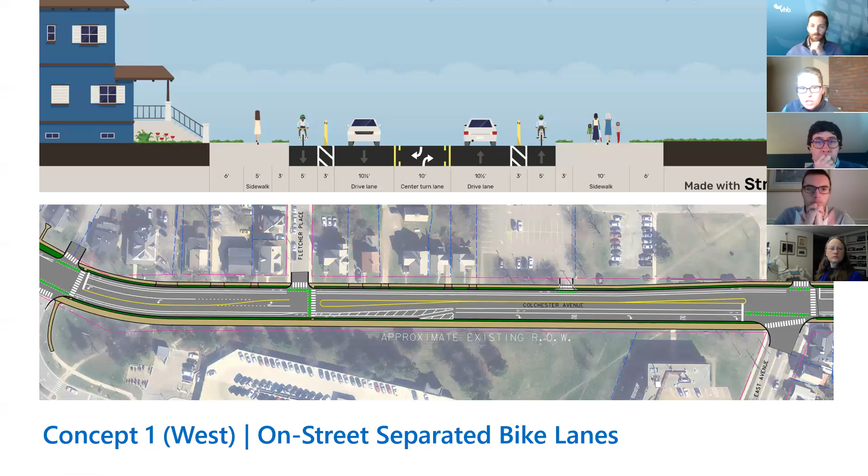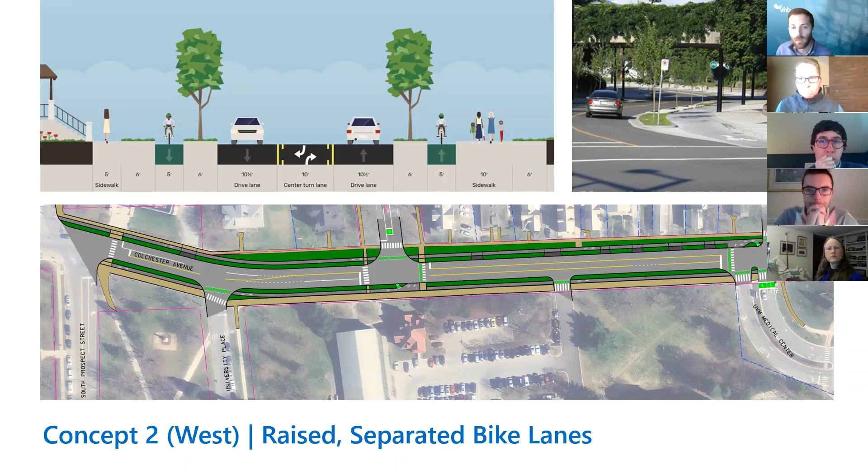Now we're going to look at Concept 2 for the west end of the corridor, which includes raised and separated bike lanes. As you'll see in the cross section and layout, the bike lanes in this case are both horizontally and vertically separated from the roadway. This design will also have a slight vertical separation from the sidewalk to clearly define space for each user. We have a sample photograph - it's slightly hard to tell the vertical delineation between the sidewalk and the raised bike lane, but we're talking a very slight change of grade just to emphasize that separation. There is enough width here to call for grass strips wide enough on both sides to allow for new tree plantings. And even with the widened grass strip, the area of impact does not extend, similar to Concept 1, beyond the existing back of sidewalk. Given the vertical separation in this case, being the main difference between Concept 1 and 2, there's naturally more space for bikes and peds to operate separate from traffic.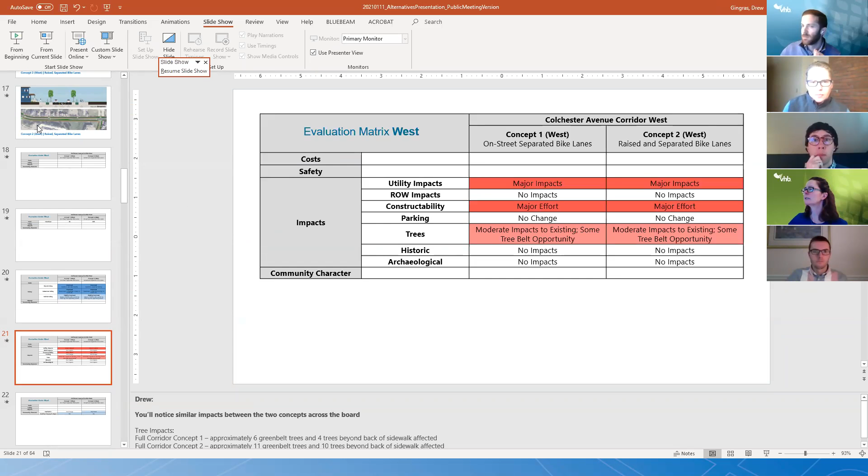And then there was another question about one version having plantings and one does not. Similar to the stormwater impact, I think the amount of green space in each alternative would be similar. It's just where it's located, correct?

Correct. So that was referring to the width available west of the UVM Medical Center driveway relative to that which is available to the east. We have it in our current concepts that there would be 6 feet of available grass strip space west of the UVM Medical Center, wide enough for tree plantings. To the east, in the interest of avoiding any private property and right-of-way impacts, we have a narrower grass strip of 4 feet, which generally is not considered sufficient for tree plantings.

Finally, there is a question, and I think we got this in some of our preliminary feedback, that has to do with how bus stops will be accommodated with the raised bike lanes. I believe that's a detail that would be worked out later, but there are examples of how that can be accommodated. Examples not being presented here, but there are design examples in the field that we would absolutely reference, making sure we are minimizing or mitigating any potential conflicts between bicyclists, pedestrians, and transit users.

In the final clarifying question—oh wait, there's a couple. One is, how do cyclists turn left on the separated raised path?

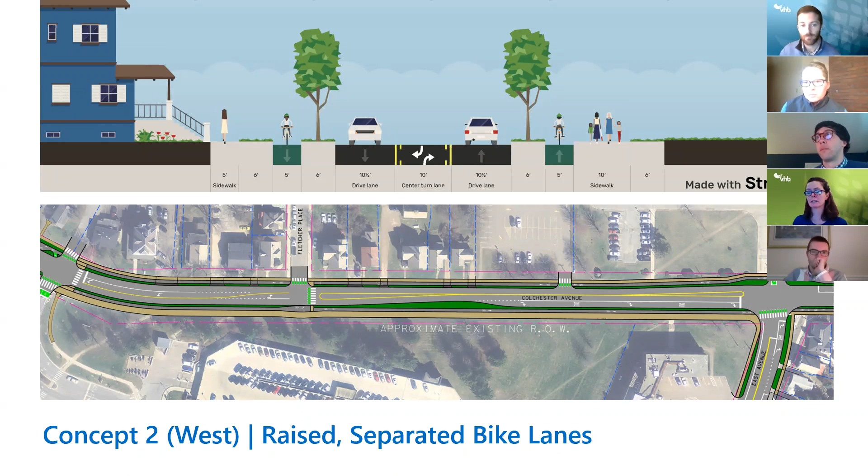There is also one other question about whether we have spoken with GMT, and I can answer that because they do sit on our committee. So we do have some input from GMT as we move through the process.

There's one question about something that happens in the design phase - what level is their involvement at this stage? I think that's referring back to GMT. As I said, they are involved at the committee level, so we are getting input from them as we go. But obviously those details will be worked out later. Drew, I think that's it.

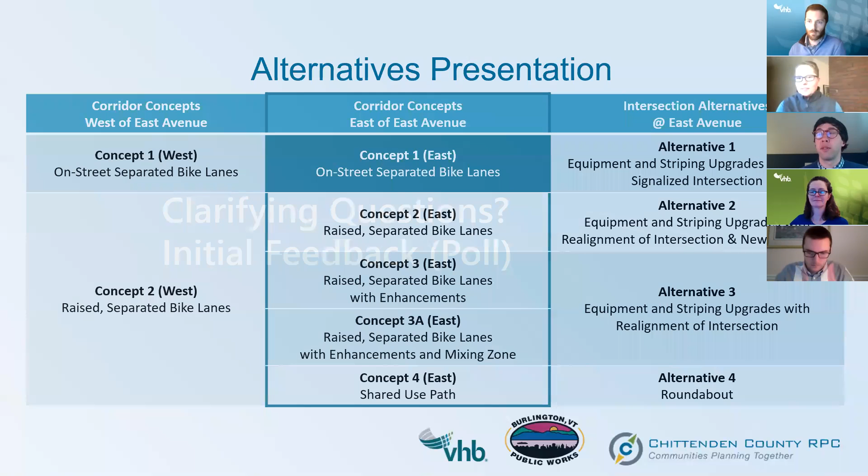All right, we all set on this section then, Drew? Yep, we do have one hand raised now. Jack's hand is raised. Jack, did you have a question? It says my question was answered live, but I don't believe it was. All right, Jack, I apologize if I missed you here. I will just allow Jack to talk really quickly so we can finish off this section. Okay, Jack, you should be able to unmute now. Go ahead. Jack, are you able to unmute? I apologize if I missed your question. I can go back, I'm sorry.

His question was: could the project team explain why raised separated bike lanes are not considered any safer than the on-street lanes in the evaluation matrix? Sorry, my connection got messed up, did I miss my window? No, but Matt did just read your question, Jack. I don't know if you did want to repeat it. If it sounds fine as read, that's okay. So, why are raised separated bike lanes not considered safer than the on-street separated bike lanes?

In the case of actual safety, this is why we touched on this the way we did - it's kind of a measure of actual versus perceived safety. Raised separated bike lanes are, in actuality, very similar in nature to an on-street but still vertically separated bike lane. So we thought it was pertinent to mention that when you're assessing these two facility types, they are actually considered equally safe against each other. However, there is the matter of perceived safety, which perhaps is what you're alluding to. That's why we touched on the interested-but-concerned population of bicyclists. When they see a raised separated facility that is off the street, we think that facility is more likely to pull in a larger cycling population to use, because they will perceive it as safer since they see it as vertically separated from vehicles in addition to being horizontally separated from motorists.

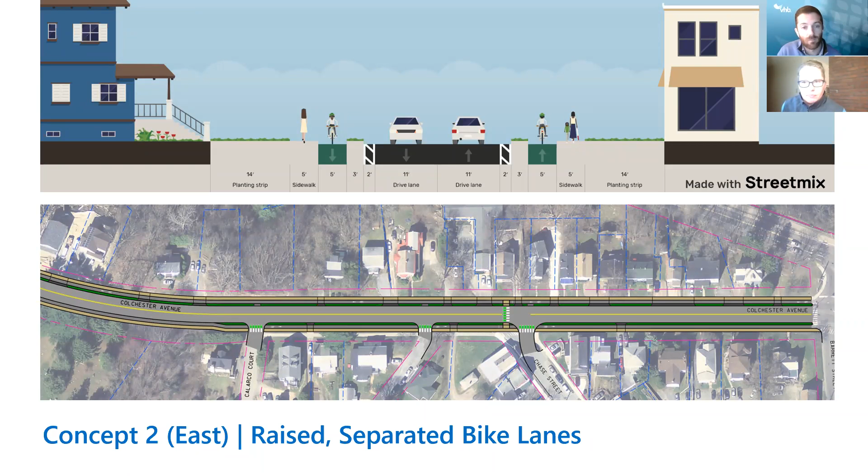All right, moving on to Concept 3. Just a reminder, for mobility - bicyclists and pedestrians - this cross-section is generally the same as Concept 2. The big difference comes with attempting to address the need for parking for residents and parking to support local businesses along this segment of the corridor. So we can see here in Concept 3 the balance of trying to implement the on-street parking while maintaining consistent facilities for bicyclists and pedestrians.

Given the presence of businesses like Kathy's Flowers and Campus Kitchen, there was an expressed interest for this parking to be located on the southern side of the corridor. So that's what you're seeing here with the enhancements made east of University Road in a few locations.

Just for everyone's clarity, we're not continuing east because continuing east of Concept 3 and Concept 3A down the hill, it's the same cross section and layout as Concept 2, just to avoid any questions about that.

So Concept 3A - as conversations developed with Campus Kitchen, it was noted that there was a strong desire to evaluate the possibility of maintaining short-term, high turnover on-street parking immediately in front of their location. As such, this specialized Concept 3A was created. It mimics Concept 3 in its inclusion of on-street parking in select lower impact locations, while also pursuing, as seen in this layout, on-street parking immediately in front of Campus Kitchen.

Given the need to balance all users in this very tight cross section, this concept calls for a change to the corridor dynamics for bicyclists and pedestrians, as you'll see between Thibault Parkway and University Road. Highlighted on this slide is the creation of a narrow shared use and/or slow or mixing zone space for bicyclists and pedestrians through the frontage of Campus Kitchen.

Given the high vehicular turnover, the project team believes it makes sense to encourage a slow zone at this location anyway. When you think about high turnover parking areas, whether it's pickup drop-off or food pickup, which is ever more important these days, we try to build in that curbside management piece to the project as we look at them.

In this section, the back of sidewalk in this concept is generally within 1 to 2 feet of the existing back of sidewalk along this entire stretch. So the impacts do reach beyond the existing back of sidewalk, but the impact is pretty minimal—again, 1 to 2 feet—to better accommodate that mixed shared use path on the north side.

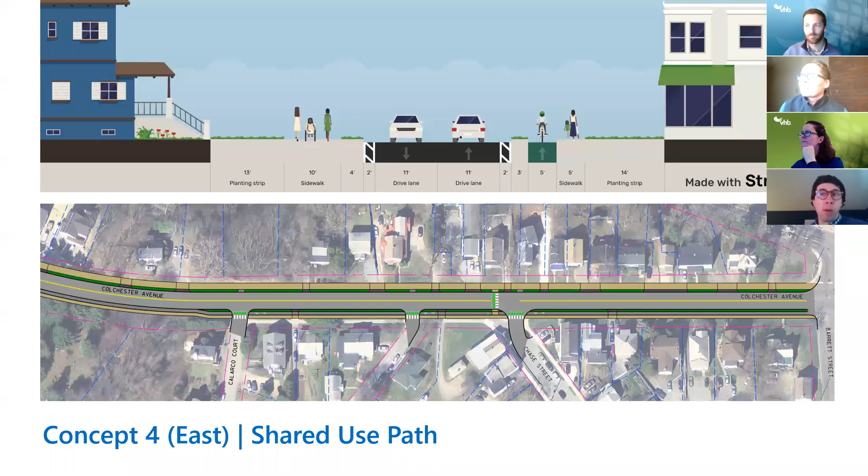Yeah, thank you so much. Can you hear me? Yep. Awesome. My question is, at the points of shared use, where you enter and exit those lanes, where do you actually enter and exit them? Going up Colchester Ave or down Colchester Ave feels like a commitment. So how do you decide which you're committing to, and how do you enter those separate lanes? And then how do you exit them?

In that specialized case, you would do as you just said: at Thibault Parkway, you would enter the road, bike in the lane, and then re-enter at University Road. So you have to wait, I guess, if it's a continuous lane for bikes, until a street entrance to exit it?

Yes, generally yes, or a driveway. I don't know that that's the right answer, but at a driveway you could go down or up, but typically it's at side streets where the ramps are set up to allow you to. Okay, thank you. Perhaps this is a better example. You can see that driveways and intersections ultimately provide you your reprieve to enter and exit the facility while traveling along it.

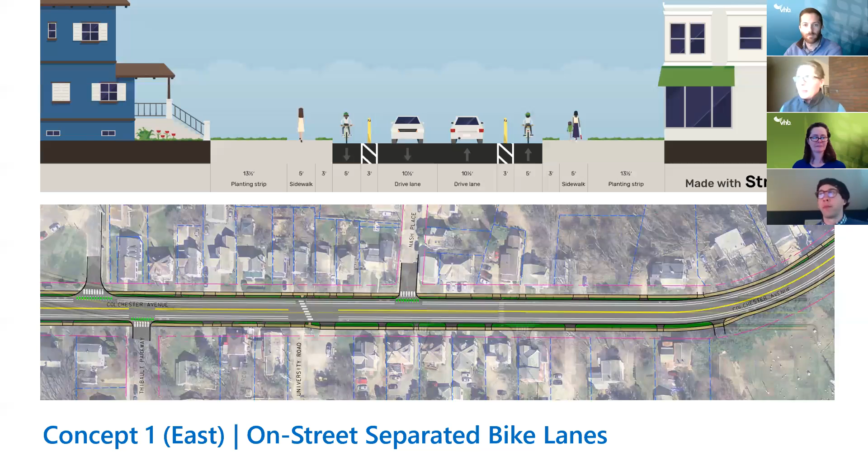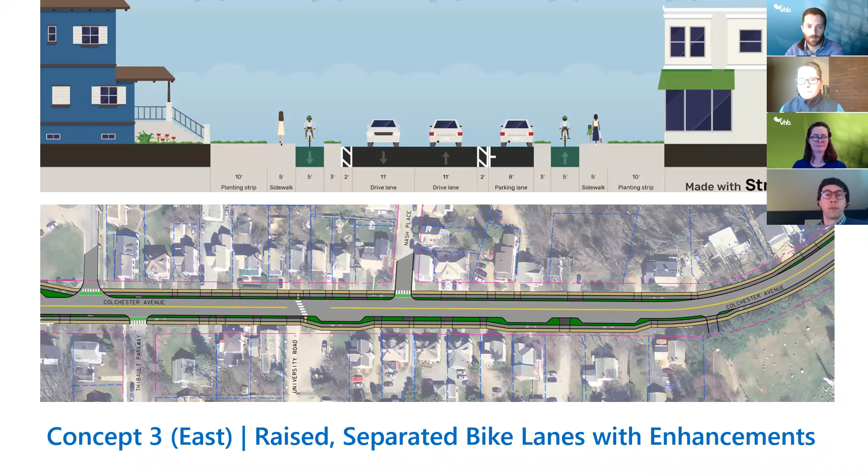Certainly. Starting with concept 1, east, our on-street bike lanes. Concept 2, east, our raised and separated bike lanes. Concept 3, east, raised and separated with enhancements in the interest of maintaining parking. 3A is the specialized concept with enhancements to maintain parking and add short-term high turnover parking immediately in front of Campus Kitchen. And concept 4 is raised and separated bike lanes in the eastbound direction and a shared use path in the westbound direction.

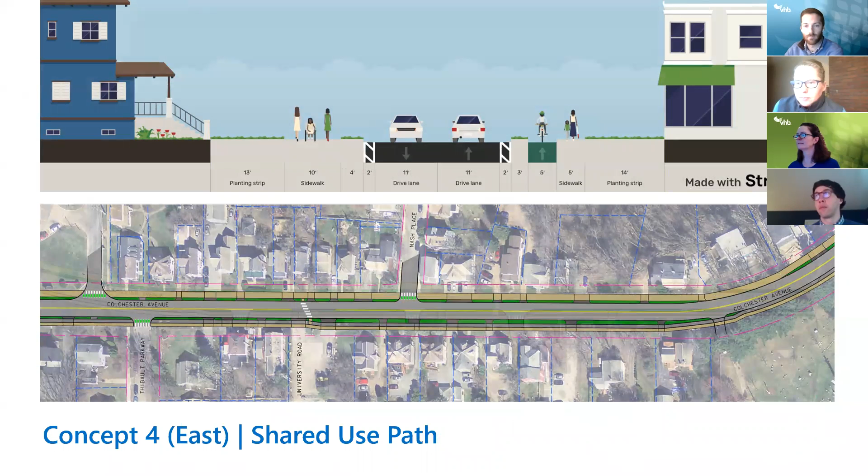And now I will ask Matt to display the poll. It looks like that is now live—if you could provide your gut reactions, please. They're coming in fast and furiously, Drew. Well, they still remember which concept was which. The responses are coming in. I appreciate that question, it was like they knew homework was coming. Pop quiz—run through the candidates one more time. All right, we're already past 60% participation. 70, huh? A bit more of a split this time. We'll give it another 15 seconds or so. A minute seems to be the magic number here. About 5 seconds left to vote. We'll go ahead and close the poll and let me share the results. All right, great, thank you all. Matt, and thank you all for your responses. Okay.

This first alternative proposes relocating the signal equipment as well as providing more bolstered pavement markings to improve conspicuity of other modes at the intersection. Alternative 2 is slightly more intensive, involving a realignment of East Avenue as well as signal relocations and upgrades, plus a very important change to the bicycle lane configuration. There's a less than desirable skew at the intersection, and this alternative proposes realigning East Avenue to 90 degrees with Colchester Avenue. This will help address visibility concerns and concerns about the speeds at which left turns are made from Colchester Avenue onto East Avenue. There's also a realignment on the north side of the intersection onto the UVM Trinity campus. The other significant change, which we think will have a major impact on bicycle comfort and safety, is the design to keep bicyclists separated in the bike lane to the right of the travel lanes. Currently, there's a short dashed area where right-turning vehicles are to yield to through bicyclists, creating a circumstance where bicyclists are between right-turning vehicles and through vehicles at the intersection. This alternative proposes keeping the bike lane to the right of right turns, which would only be possible through installation of a bicycle signal face and a separate bicycle-only phase, both proposed as upgrades to this alternative.

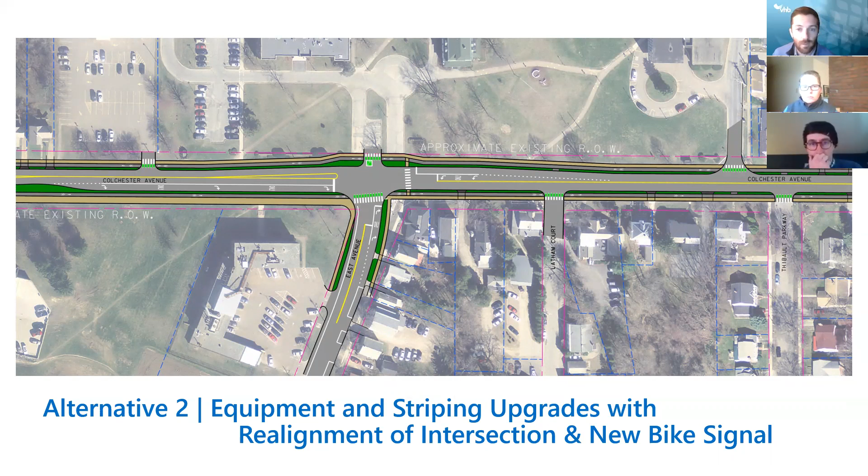Okay, and the third alternative for the intersection with East Avenue is similar to the concept that Drew just shared, with the exception of the bike treatment.

In this alternative, the intersection is realigned and upgraded with relocated equipment, like in alternative 2. But here, the eastbound bike lane is brought up to the intersection so it can navigate with the through vehicles, positioned between the through lane and the right turn lane. Those bicyclists would be accommodated at the intersection alongside through movement vehicles. In this option, the bicyclist is certainly more exposed than with the dedicated bike signal that Drew just shared with us.

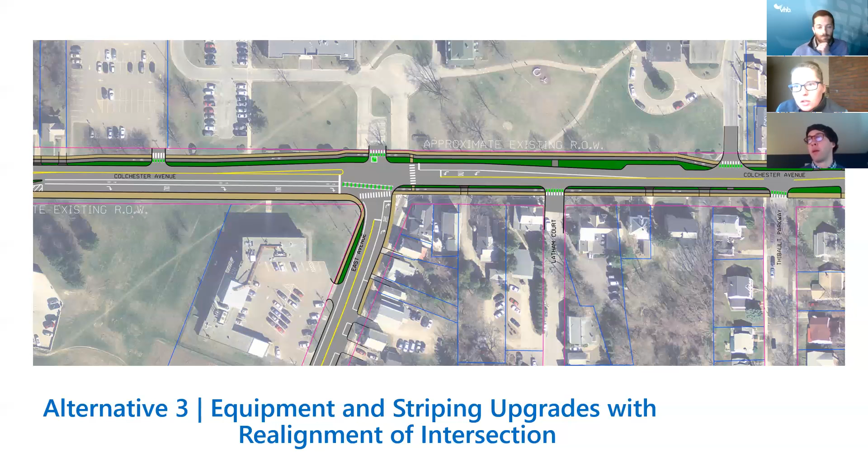And then the fourth alternative for the intersection with East Avenue is carrying forward the concept from previous planning efforts to have a roundabout in this location.

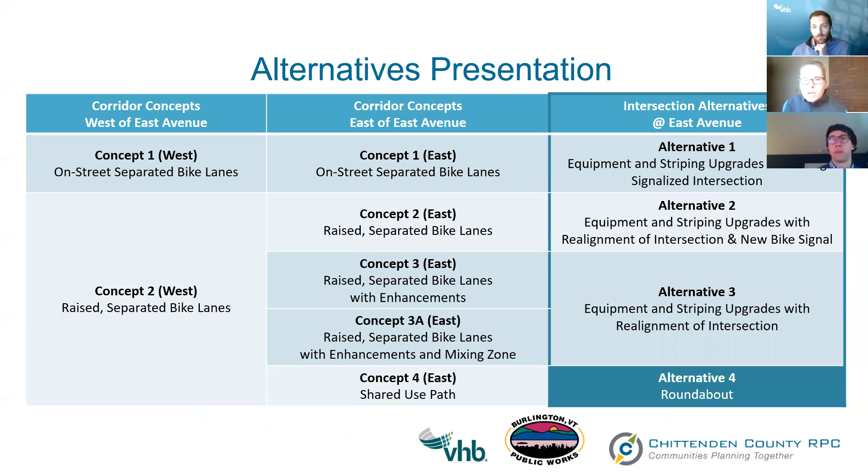The roundabout would also square up the intersection with East Avenue, bringing it closer to a 90-degree angle with Colchester Avenue, and would realign the entrance to UVM's Trinity campus. The roundabout would have an inscribed diameter of 110 feet and formalize the crossings on all four approaches, a bit different than what's out there today, and would certainly provide more access in that regard.

Similar to the corridor concepts, these intersections were evaluated side by side through the evaluation matrix, with cost, safety, impacts, and community character as the metrics.

From a relative cost standpoint, we're seeing a range of treatment options, from simply upgrading and relocating equipment, represented as the single dollar sign here, all the way up to significant road reconstruction work for a realignment, and even more so with a roundabout option.

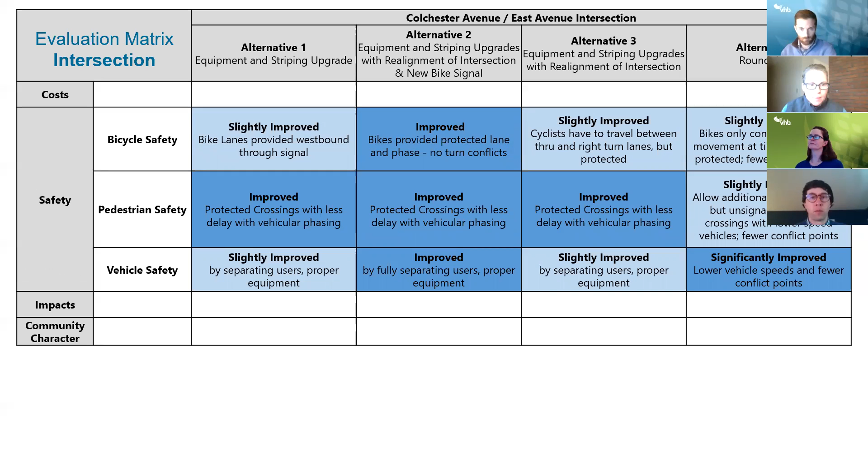In terms of the impacts of the intersection treatments, these were also compared side by side in all four cases. There would be major impacts to utilities and minor impacts to the right of way, most of that through the impacts on the northern side of the intersection there at East Avenue.

For alternative one, this would involve new or relocated mast arm poles and mast arms, a more minor effort in terms of constructability. For the other alternatives, the major road work required for realignment or roundabout development would be pretty significant. For the realignment and roundabout intersection treatments, there would be a reduction of 2 to 3 parking spaces along East Avenue, right near the intersection.

And minor impact to trees. There are 1 to 2 trees really close to the intersection, so it's anticipated there would be impacts to those 2 trees in the area immediately around the intersection.

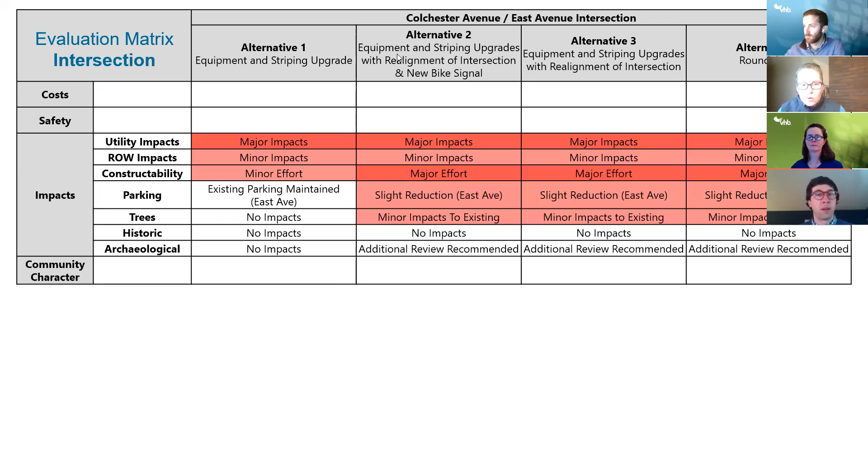It's important to note there was an archaeological assessment of the corridor, and it recommended that areas along the UVM Trinity campus frontage, any impacts beyond the existing back of sidewalk, should undergo additional review, since that was identified as a sensitive area. Not necessarily anything known, but just to have folks looking at that if there are impacts beyond the back of existing structures.

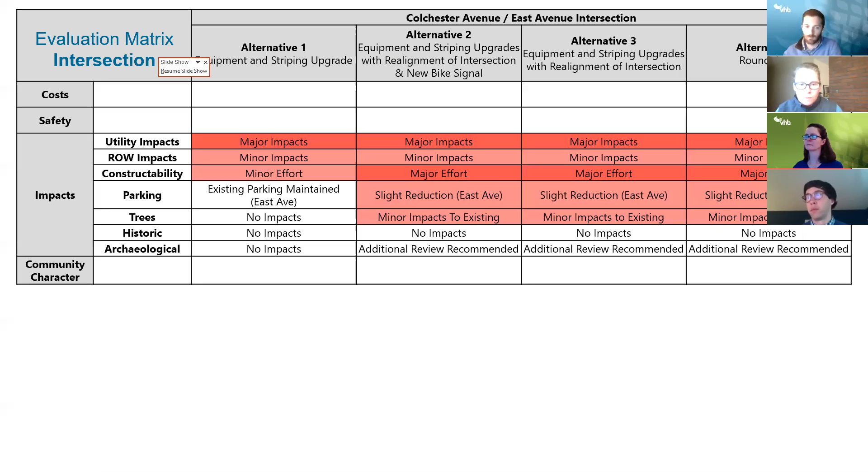I'm ready for some- oh, sorry. Not quite yet.

The alternatives that leverage curbing to separate facilities and provide greenbelt space were considered improvements to the aesthetics of the intersection in this case. So that was an improvement for alternative 2 and alternative 4.

All of the intersection alternatives would satisfy the purpose and need, particularly in terms of safety. The upgrades to equipment and striping would address the primary recommendations from the Highway Safety Improvement Program report. The realignments in alternatives 2 and 3 would follow through on the secondary recommendations from that report, so really the focus is on safety at this intersection. All of these alternatives would help satisfy those recommendations, and the roundabout alternative would similarly provide significant improvements to safety at this high crash location intersection.

Hey Karen, can I just ask a quick question? You don't need to go back, you can stay where you're at as far as the slide goes. But I had a question come in over email, and I thought now might be the right time to address it - just the traffic performance of the roundabout compared to the signalized intersections. I think people know what the congestion looks like today on a daily basis with the signal, but this person was specifically curious how the roundabout would perform comparatively.

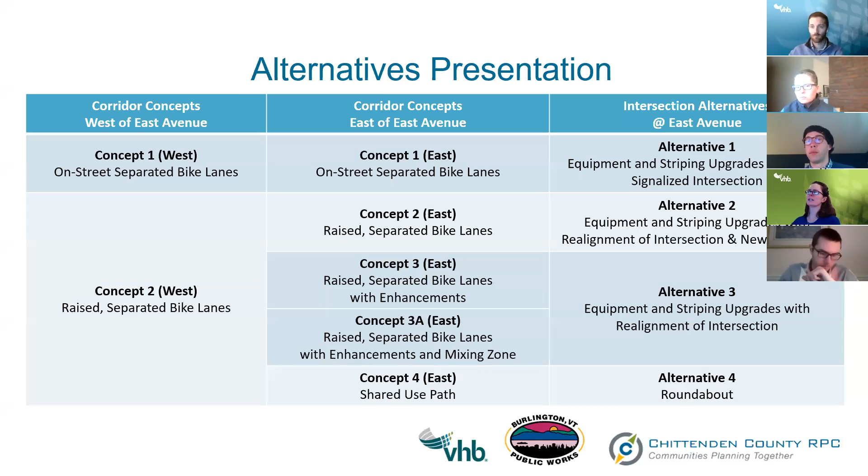Another clarification - there are some impacts also to Trinity Road at UVM and those EV charging stations, even when that intersection is just being shifted. So just a comment on that as a differentiator, I suppose.

What are the emergency vehicle impacts with option 4, the roundabout? All the ambulances pass through this intersection to get to the UVM Medical Center.

So that was assessed. Oh, do you want me to go? Sorry, okay, so that was no problem.

That was assessed. This question came up at the local concerns meeting as well as our advisory committee meetings, since we have a representative from the UVM Medical Center on the advisory committee. We assessed it against emergency vehicular speeds of up to 10 miles an hour traveling through the roundabout, which we see as fairly analogous to an emergency vehicle's approach to a signalized intersection with sirens and lights blazing. We see minimal speed differential between the signalized intersection and the roundabout in this case. The roundabout alternative does have a truck apron, but the 10-mile-an-hour assessment does account for avoiding that truck apron, as the implication of any vertical deflection for an emergency vehicle is less than desirable.

Clarifying questions on the roundabout. In the separated bike lane options, how do bikes enter and exit through the roundabout? How do bikes get around the roundabout? If they're in a separated bike lane, what's happening at that roundabout for the bicyclists?

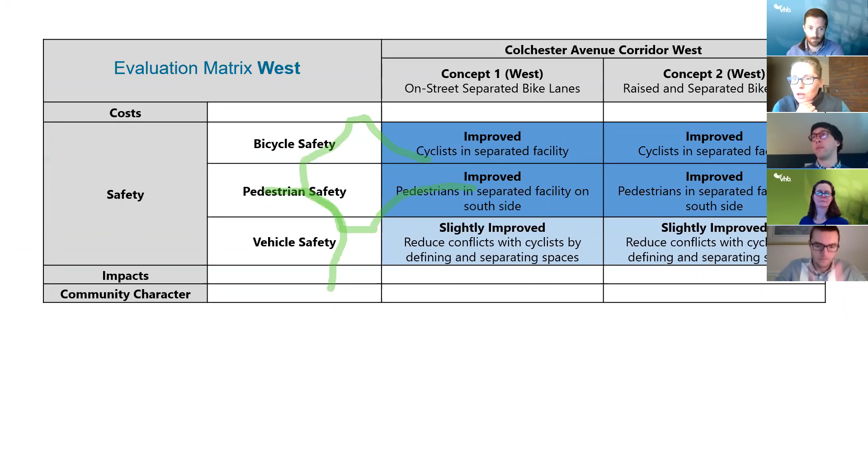I think everything else I have now is more commentary and not clarification questions. I think now we'll take our final immediate response poll for the intersection alternatives, and then we'll open it up for public input and general discussion.

And that poll is open. We're already at 75%. Everybody felt strongly about this one, huh? This is great, we'll give it another 15 seconds or so. 89% participation, this is great. Okay, I'm going to go ahead. 5 seconds, last call for the 3 people out there who haven't voted. I know at least one of those is a phone user. Okay, we're going to end the poll, and everyone should see the results pop up.

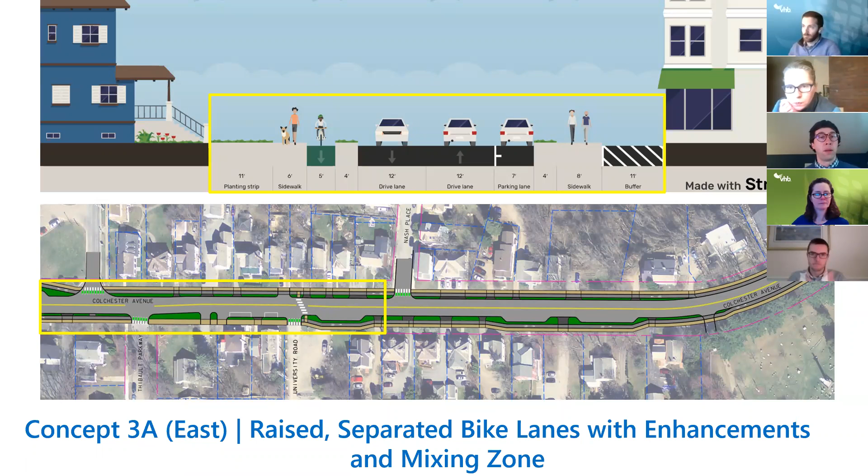One of my questions here is, I asked a few questions about the lane widths. It seems like we're so close to having room for the continuous raised bike lane and the sidewalk and avoid this mixing zone, which seems a little hazardous to me. It's not a compromise we would ever ask of people driving to share their space in that sort of same unpredictable way that I think this will work. Why not narrow the green belts by 1 foot to find that extra 2 feet for the sidewalk and the separated bike lane?

That could certainly be considered. Yeah, I think that would be great to look at. And if not that, I agree, maybe looking at the property right of ways. I think achieving that continuous bike lane would be really worthwhile.

Beyond that, I think these are really great concepts. I think the separated raised bike lanes are really what this corridor needs. There are a lot of people walking and biking here, and a lot of new users, as we know, buying bikes as bike shops are sold out. This kind of infrastructure is really what makes folks feel safe, and we know that when folks feel safe, they're more inclined to ride. There is a really strong safety in numbers effect. When there are more folks out riding, drivers tend to watch for people riding more, and that really increases the safety.

As far as the roundabout is concerned, I do think the splitter island width is worth looking at. There are a lot of people riding cargo bikes, bringing their kids to school, and those are certainly longer oftentimes than the 60 inches that I think was mentioned for those splitter island refuges. So just some things to look at there.

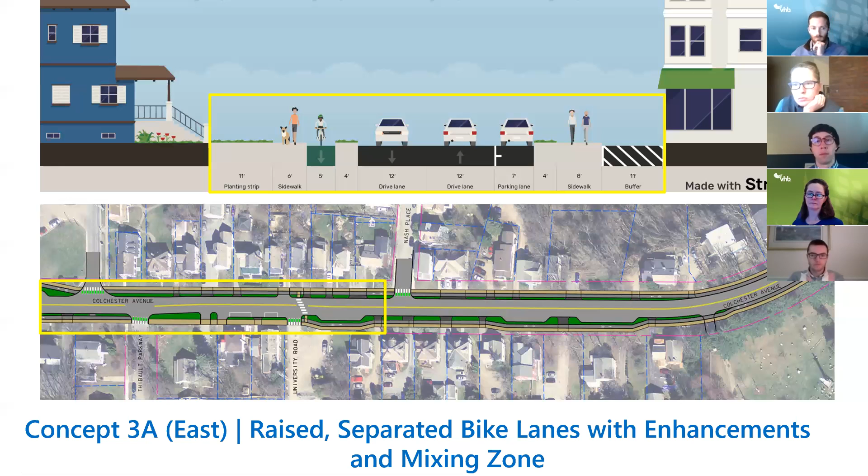Where you can look at it, like it's been brought up, when it rains the stormwater down the street is very heavy, sometimes several inches. So whichever option facilitates stormwater best, I think that's important. And where you can bury the utilities, that's important as well, because they present an obstacle to the greenbelt space and a number of other things. But overall, I support any of the options going forward to improve what's there, but the best one is thinking forward for the next 20 or 30 years. Thank you very much.

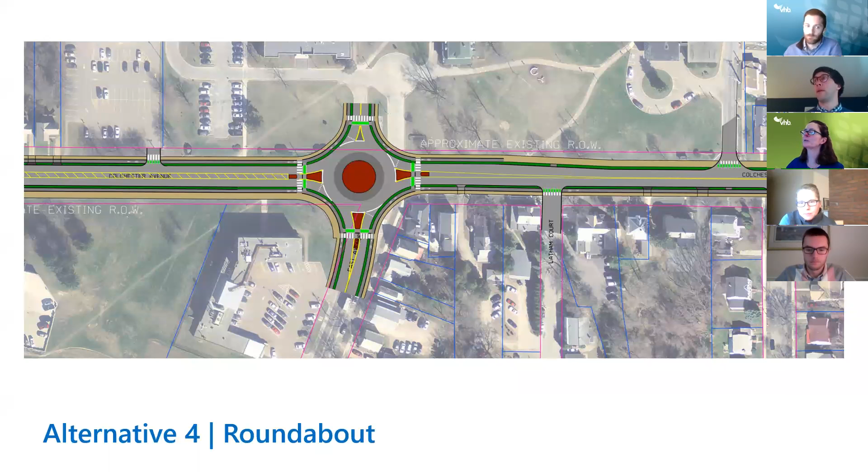Thank you very much, Greg. All right, we do have a little bit more in the Q&A, and we are really up against time here, but I will just go through. There was a thank you for addressing the bike park question, and then a comment that the roundabout reduces 3 different left turn lanes.

All right, well, with that, I'll click forward to our final slides here. I assume everybody can still see the presentation up on the screen. So first and foremost, thank you for everybody's interest in this project. I think it's clear to see this is a heavily involved public, and it seems like that's what really feeds these projects, that's what keeps them going. So thank you for your extremely thought out questions and great feedback.

Also, thank you all for being respectful to one another and to the project team. These forums can always get heated, and I thought everybody here was extremely respectful of all of the ideas being presented here. So on behalf of the project team, thank you for that.

Just looking ahead for our scoping study, the next steps will be to select a preferred alternative. From there, we will have one final, third and final meeting with our advisory committee, in which case we will then have our refined preferred alternative. And with that, we will bring that recommendation to the Transportation, Energy, and Utilities Committee, as well as City Council for their approval.

We did have, I know we are over time, final poll questions. I don't know, Jason and Nicole, about revisiting the selected alternatives. I know at this point we've had a few people drop off, so I'm not sure if it's appropriate to ask those questions. Just figured I'd gauge people's thoughts on that. Do we want one final poll for people's preferred alternatives?